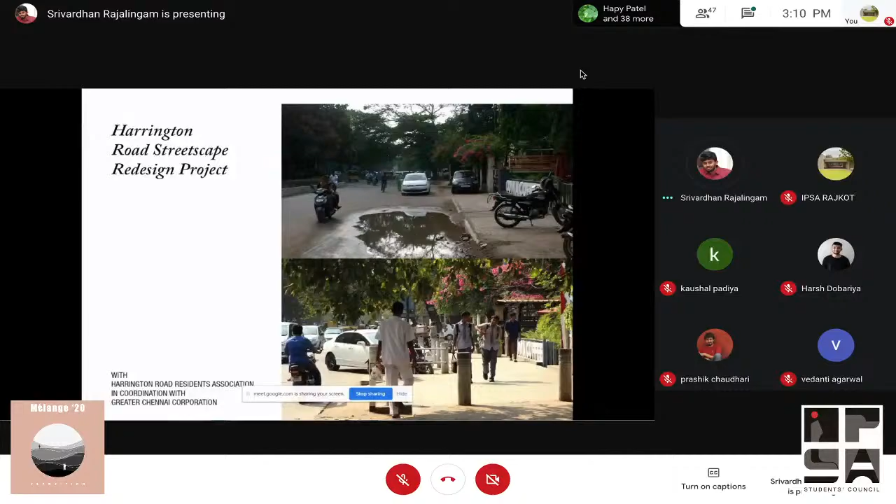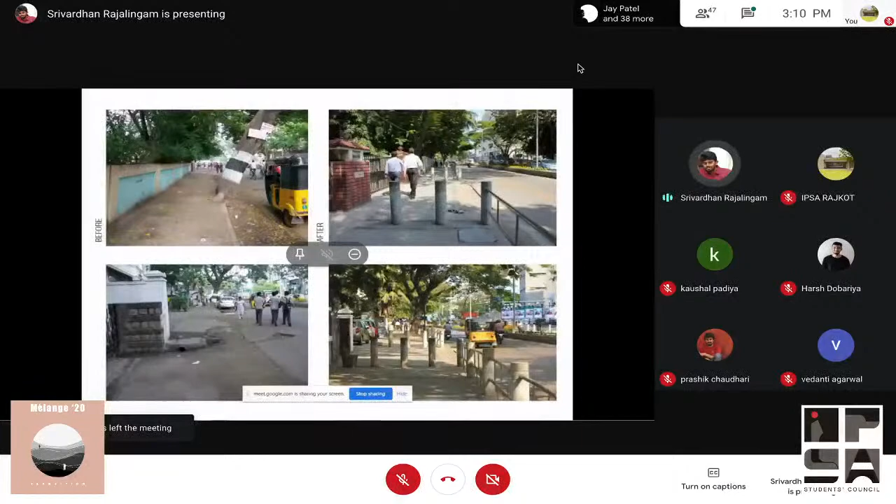This is one of those streets where a wheelchair user can access the entire street without getting down. The highest priority is given to pedestrians, who can walk continuously along the entire stretch without needing to get down or go up. It's made completely accessible. These are some images showing the before and after transformation.

Moving to the next one, the Accessible Beach Walkway project, again a community initiated project. Here in Chennai, on December 3rd, which is World Disability Day, they make temporary mat tracks for wheelchair users to access the water.

Marina Beach here in Chennai is one of the most used public spaces, yet it's not accessible. But as per the 2016 Disability Rights Act, all public spaces and buildings are required to be accessible.

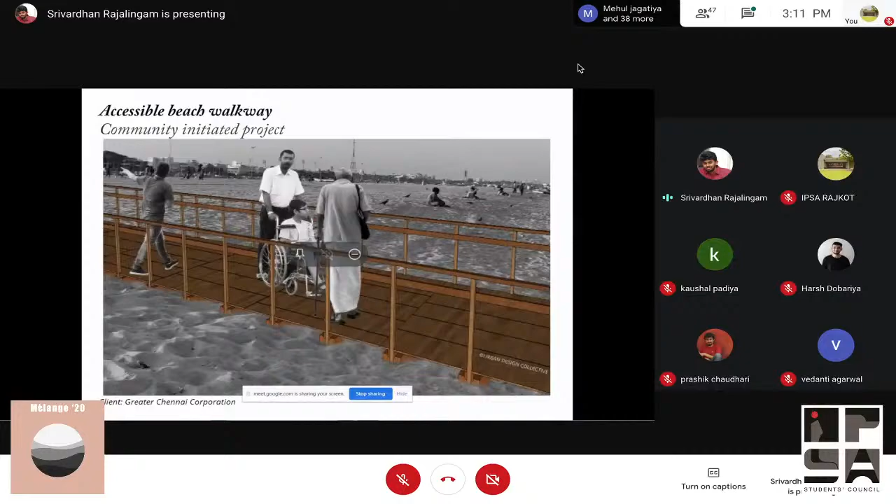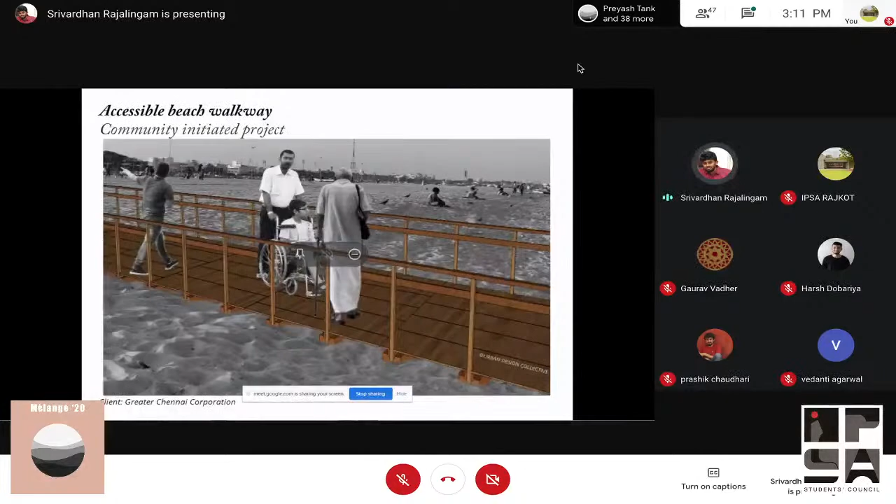Since then, this project has been happening temporarily, where they had the mat, and a couple of years back the commissioner decided this can be made permanent. So since then we have been working on this project. This is a pathway that leads to the water, and this has been going on for almost 4 years now.

There have been multiple changes in location because this requires CRZ clearance, community concern, and all of that. When we went to one location to meet the community, we actually had a setback, because this was along the village death procession route.

So they had opposed that particular pathway, and we had to drop this location. This is how stakeholder engagements happen here, where if we are moving a project and there is opposition from the people, then we cannot go ahead and implement the project. There has to be a way to accommodate their needs as well.

For this particular community engagement meeting, we had actually taken a model of the pathway to show them what is going to come up, so that they can understand and see if their activity can still continue. But since they had oppositions, we dropped this location, and now we are working on shifting it to another location, which is still work in progress.

For this particular site, the meeting happened after we had submitted the DPR, everything was ready, tender was called for, the contractor was ready. But since the community leaders had expressed their opposition, we had to drop this particular site even at the almost the end point.

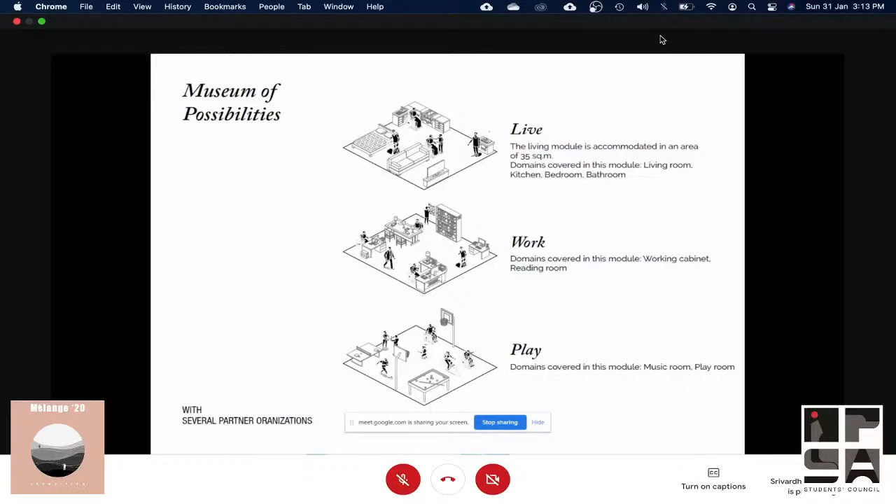This museum is actually a demonstration, an interactive museum where they can use and experience different devices and assistive technologies. There are so many assistive devices, aids, and other things that actually help them overcome disability and function at ease on a day-to-day basis. This museum is a demonstration of all of that.

This is currently in a detailed design development phase, which is back and forth work, because we as architects and designers have to understand what their requirement is, and it's being designed with them as per what they want for these spaces and other things.

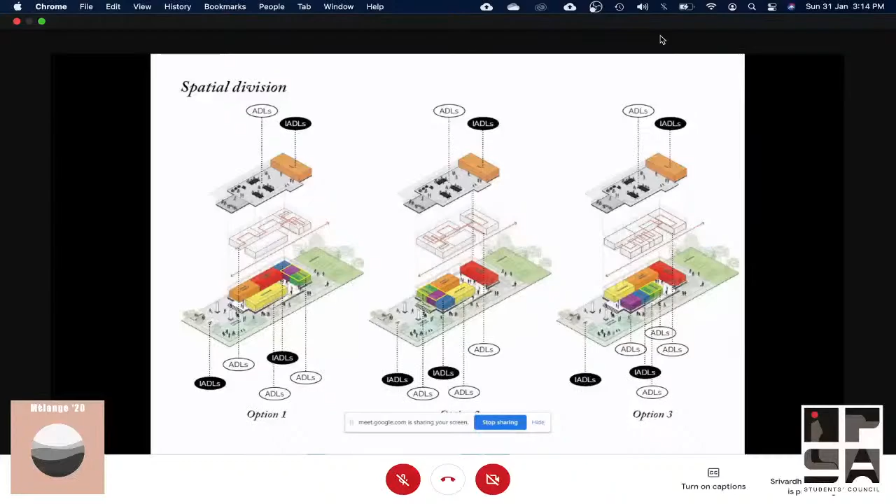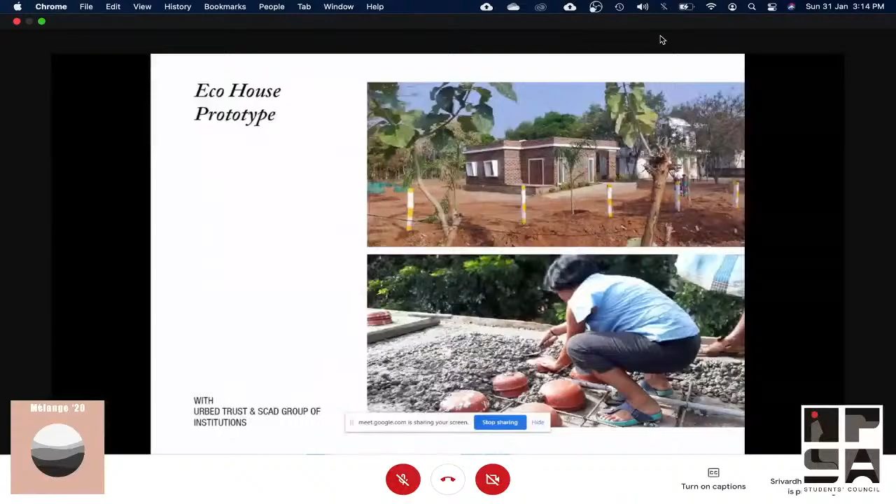The next thing is a residence project, done in Tirunelveli, a guest house. This is a completely eco-friendly house. The way of engaging the community here was that most of these were their own traditional styles from their neighborhood villages, but today a lot of these are not in practice.

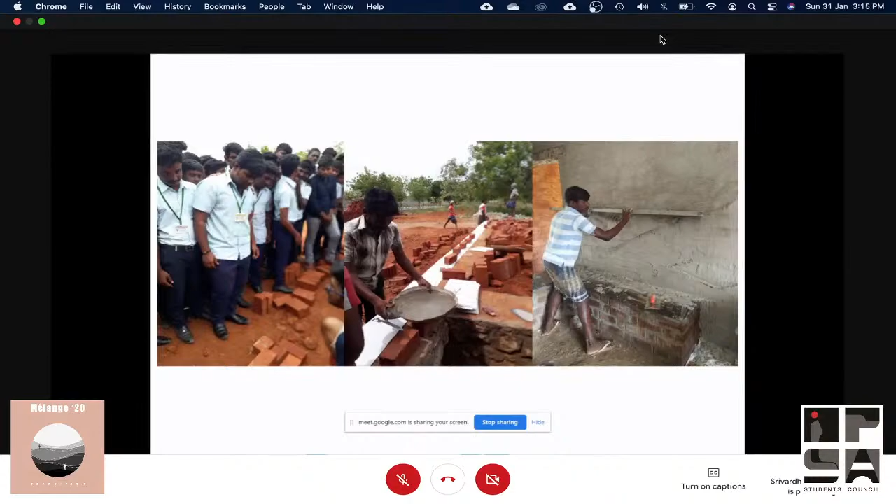This is inside an institution campus, so we had gotten civil students to understand how this was done. This was also done as a capacity building exercise for the local labor, so they understood how to work with their own techniques and make a house that is completely sustainable and low cost. This is how we taught them to do that.

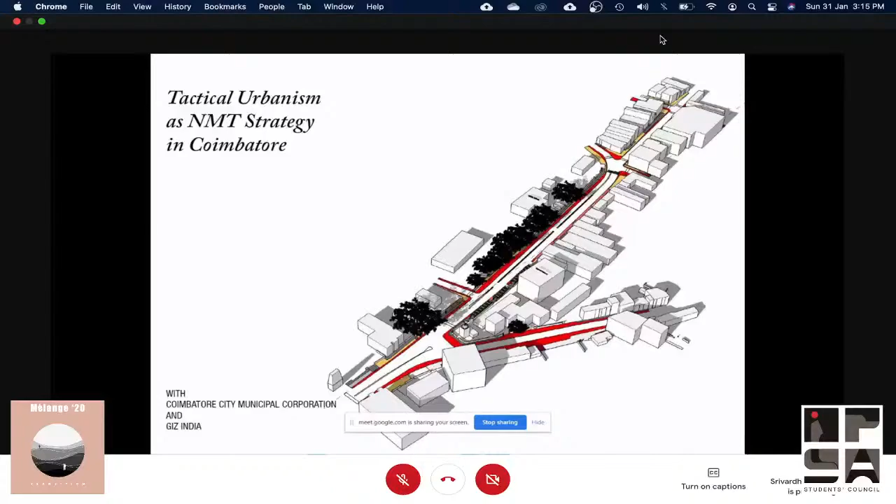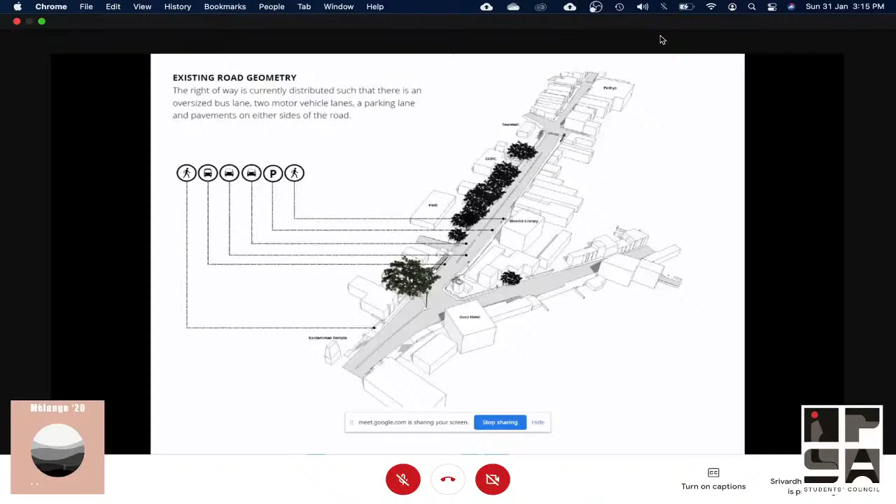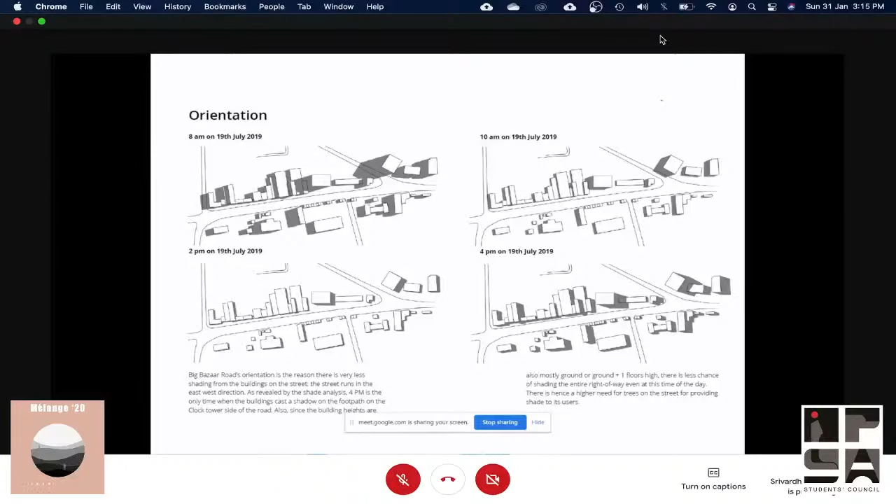This is a street redesign project, a demonstration of a complete street project. We wanted to do a short-term action that would lead to a lot longer-term change. This is the existing street condition, and we had resolved all of those based on the actual requirement of the site. We did a series of mapping and other analysis.

This analysis talks about orientation and shading at that particular street, and since it lacked shade, we proposed shading structures. This is how it looks when the entire street is redeveloped as per what is actually needed. The full extra carriageway space, the space for vehicles to move, was streamlined.

In general, streets are considered as just something for vehicles to move, but that's not the case, as there are so many other users—vendors, pedestrians, cyclists, and all of that. So this space was regained for all of them and shown to the public on how it works. These are some of the images that we have.

As part of this, we also tried to understand who the user groups are and how much time they spend. Based on that, post implementation of the temporary tactical urbanism, we identified the list of user groups and the time we could engage with each.

So that's done. I'd like to conclude with what a student can do, and what important things to keep in mind with respect to public participation. The first thing is informing the community about the plans, process, and decisions.

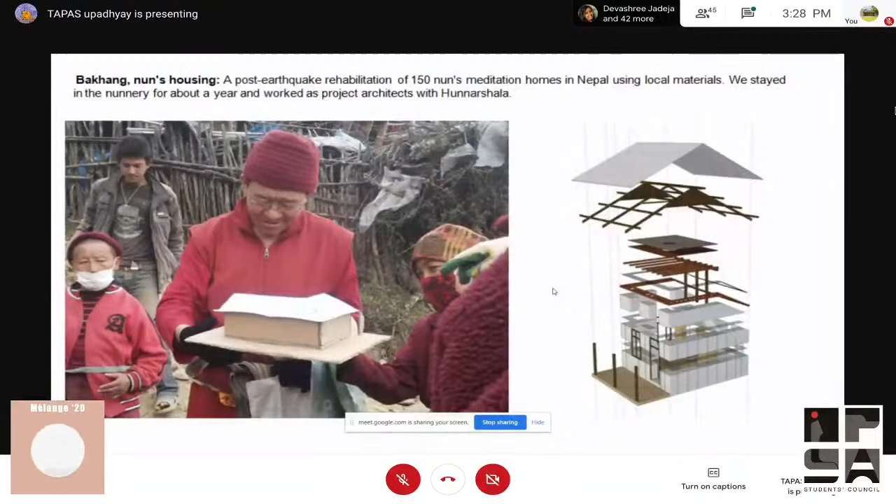So then we built the model with certain basic elements which we had over there, and presented it in front of them. They were very happy to accept the model and the approach we were taking. And then we built these 150 mud houses.

This is a place with no road connectivity, even no electricity at that point in time. So everything we had to build was by default with local stone, or reclaimed stone from their old houses, and mud which we got just beside the site.

So now what I'll be doing is just share the images and explain the process as well.

Here the nuns were so excited for their new houses, also because they were living in poor conditions after the earthquake had hit. So this was partly a public participation and partly contractor participation process, in which the nuns were responsible.

They were very happy to bring mud onto the site, apply it on the surfaces, and also help the masons to build their houses.

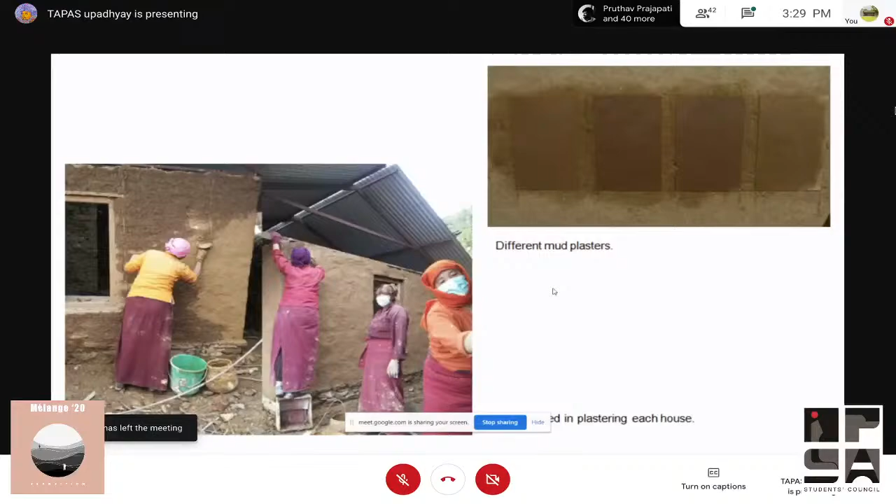In this process we also came across a strong aspiration towards urban areas, because all of them really wanted to build cement houses for themselves. But with a lot of public interaction and imparting understanding of why it was not possible in this space and time...

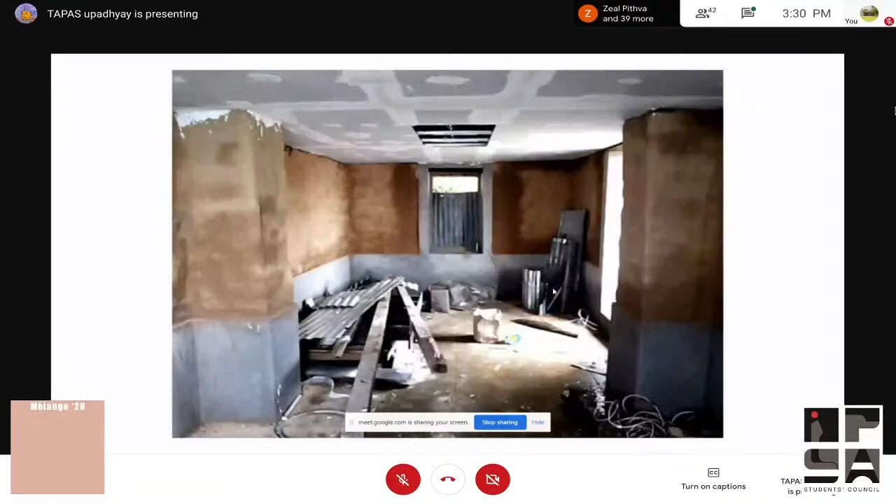...we came around with a midway approach, in which we tried to use urban materials in a very specific way.

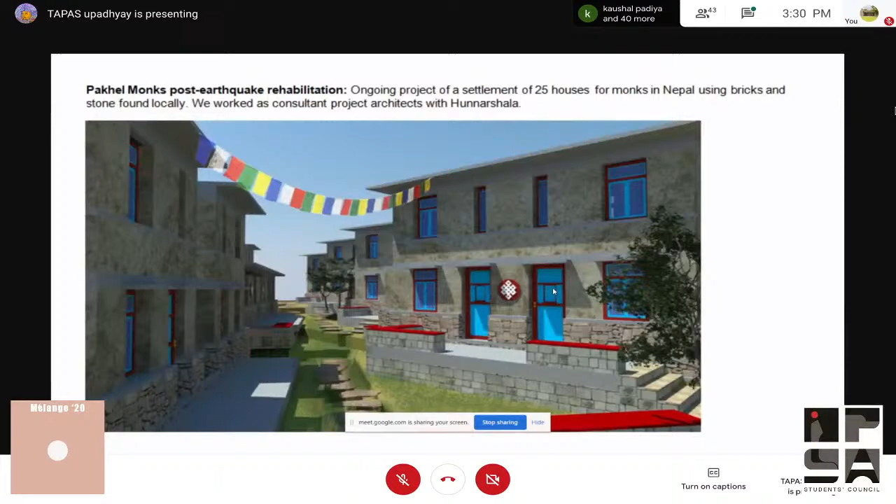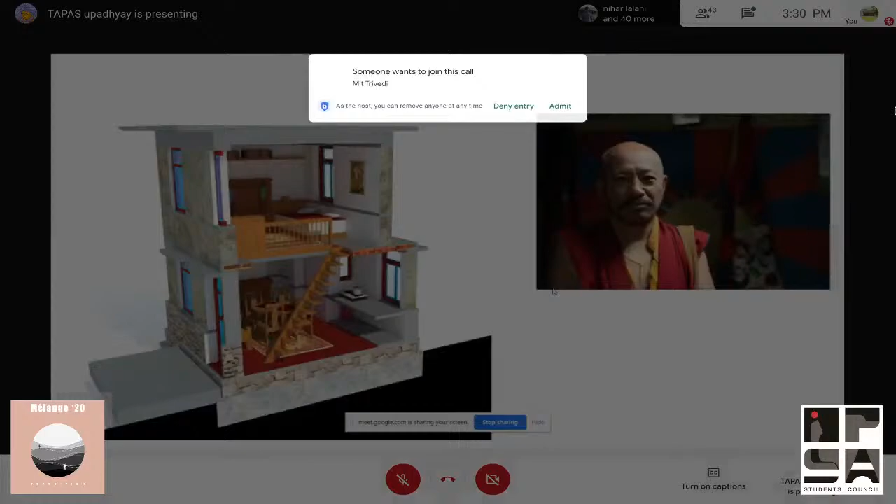So this was the short story of Bagan. Then there was another set of monks, Tibetan monks, different from the nuns, with a different set of thinking as well, and with all the social process involved - this is the ongoing process here right now.

The second project we were involved in was in Uttarakhand, in Baram - a small village. This was the only school in the whole region, where all the students would walk for two hours to come to school to study.

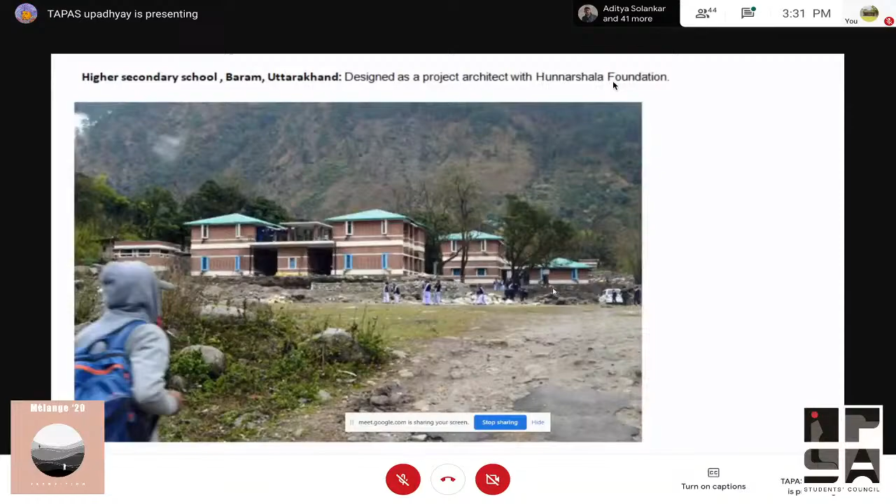So it had to be very responsible design by default. We interacted with all the children in participation sessions - how they wanted to study and why - with separate meetings with the school kids, teachers, and authorities. Then we came around with a certain design and material palette for this situation.

After this five years of journey, we were thinking about how we wanted to proceed in our life, because we were very sure that we didn't want to specifically build only buildings or structures, but wanted to build relationships - human relationships. Building human relationships is also, I think, an architecture in itself, if we see it in a different way.

With this whole set of thinking, we came around with a process we call Agor, in which we can collaborate with individuals and build or create something which is humane.

Also when I was at Hunnarshala, I was very fortunate to document all the masons who are there and who are carrying the living tradition forward.

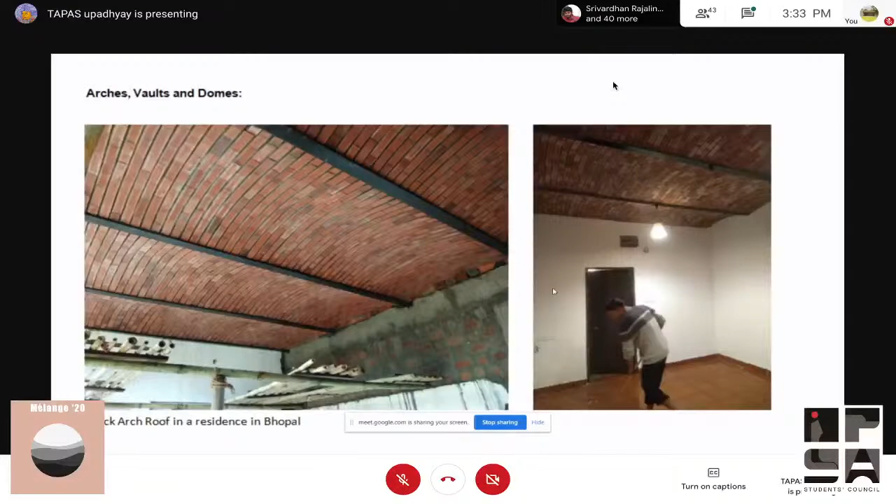So this, with different material as well. In urban areas, personally I think that locally available material is not stone or other prepared materials, but the waste materials, like debris waste or other kinds of waste which you have. So how can we create possibilities to build the structure with this thinking, this set of thinking?

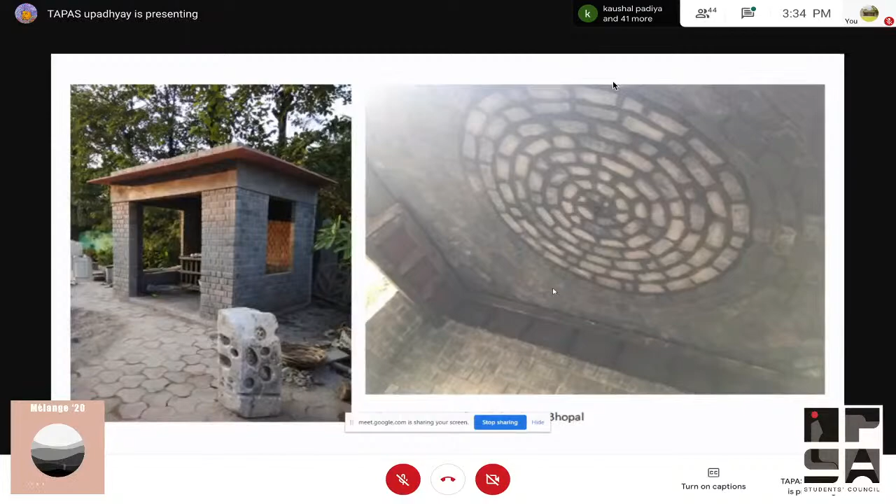In this situation, we tried to build a shallow masonry dome with fly ash, debris blocks, and all the stuff as well. And then we started our practice collaborating with local masons from Rohtak. You can see in the right photograph, he is Azad Bhaiya.

We collaborated and performed a workshop on shallow masonry dome throughout several colleges in our country. Then after that, we got the chance to explore our thinking and local available building craft in and around Bhopal as well.

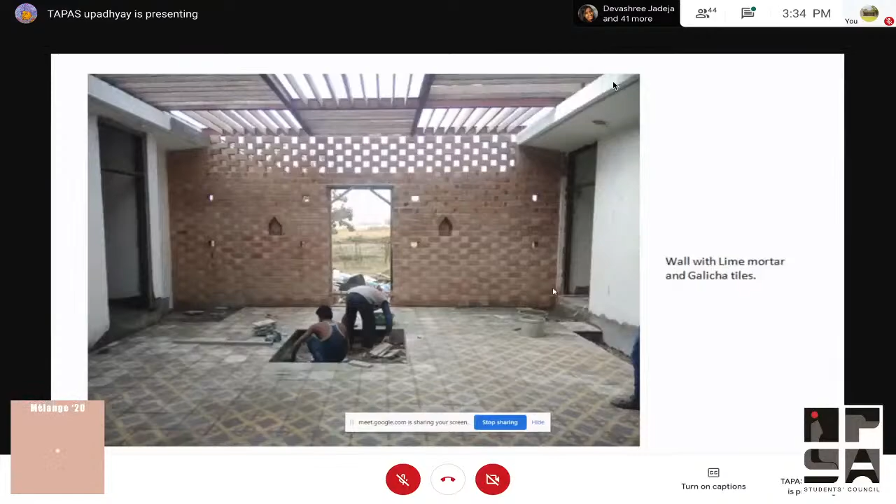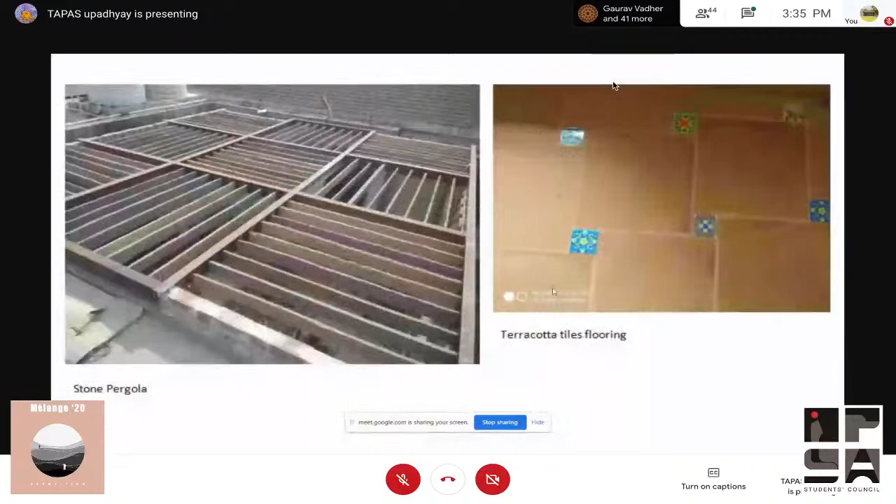For example, here we tried to explore galicha tile. Galicha tile is a handmade cement tile with different beautiful patterns, which you can get in several parts of the country as well. But here it was a very old craft, and it had been washed away by the new tile techniques.

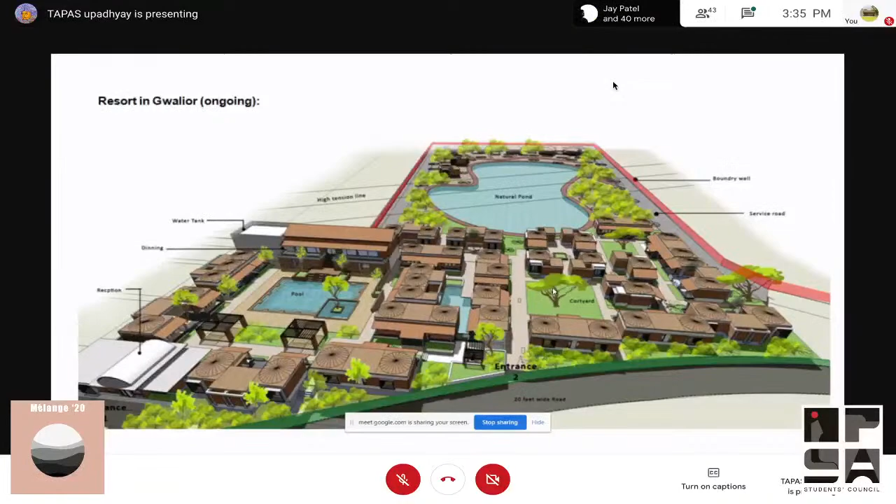And now we wanted to collaborate with more people and more artisans, who cannot necessarily be trained in the traditional craft, but there is a village very near to the site called Panihar. So we visited Panihar and talked to the masons, and they were very interested in learning and exploring new ways of building which they hadn't explored until now.

So then we collaborated with them, and we built all the rammed earth wall with them and all the things which you can see over here.

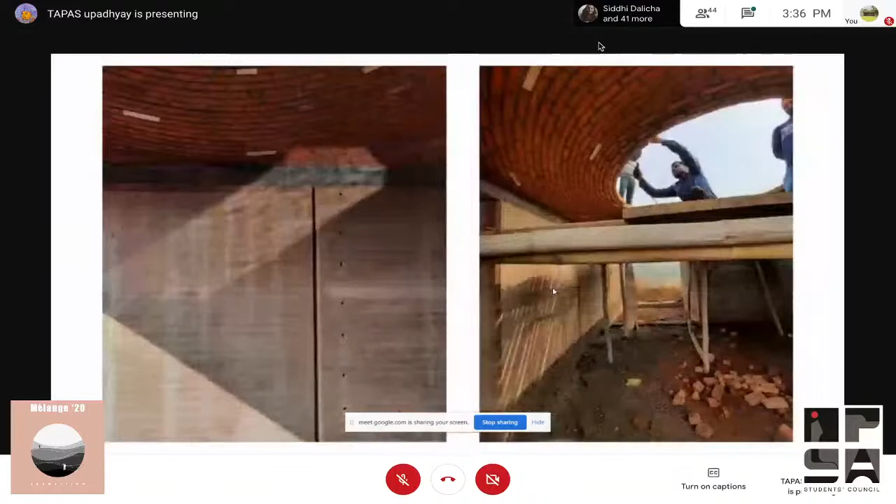We also continuously collaborate with the local masons of Haryana and Uttar Pradesh to come up with new possibilities and new aesthetics of the traditional craft of Daat ki Chhat. Here we are using stones and new patterns and also new materials.

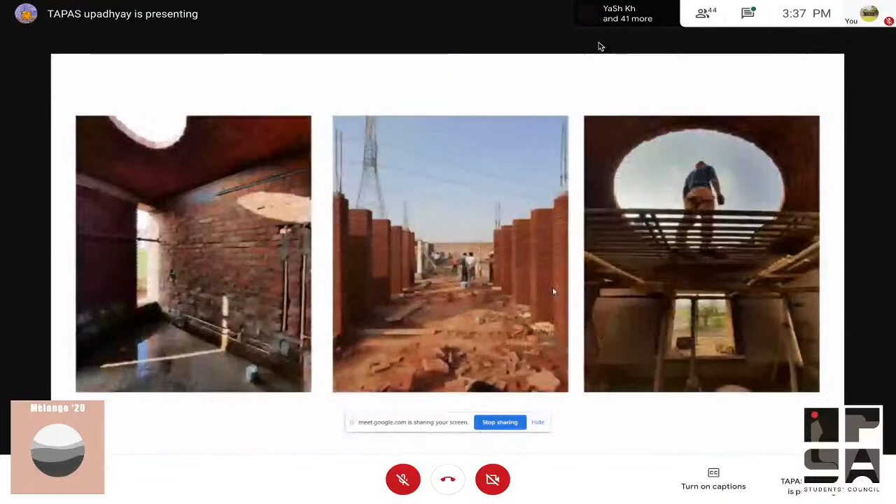For example, in Gwalior, we thought of using this farsi silbatta, on which we used to prepare chutneys and all the stuff. We thought of using this somewhere beautifully in our structure as a harmony. So we came up with the idea to basically...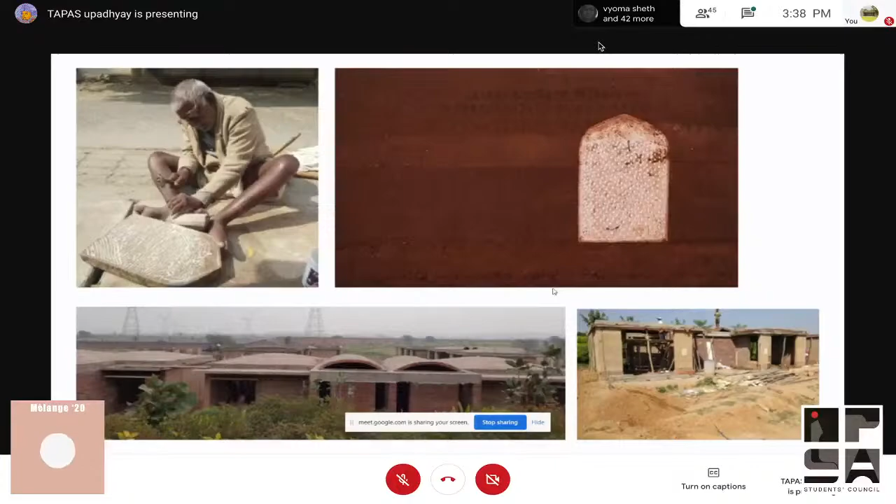...emboss room numbers on the silbatta and then emboss it onto the rammed earth wall. So it came out beautifully, and of course there are new possibilities for the arts in domes and walls.

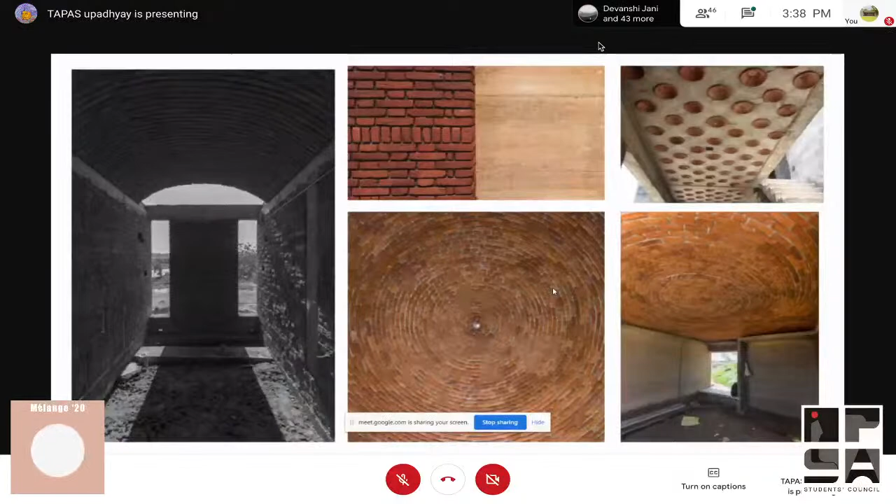This is another project in Bhopal. This was done recently on a campus called WALMI, Water and Land Management Institute. The authorities there really wanted to build something that would be an example for the whole city, showing how you can build right now with the present global scenario.

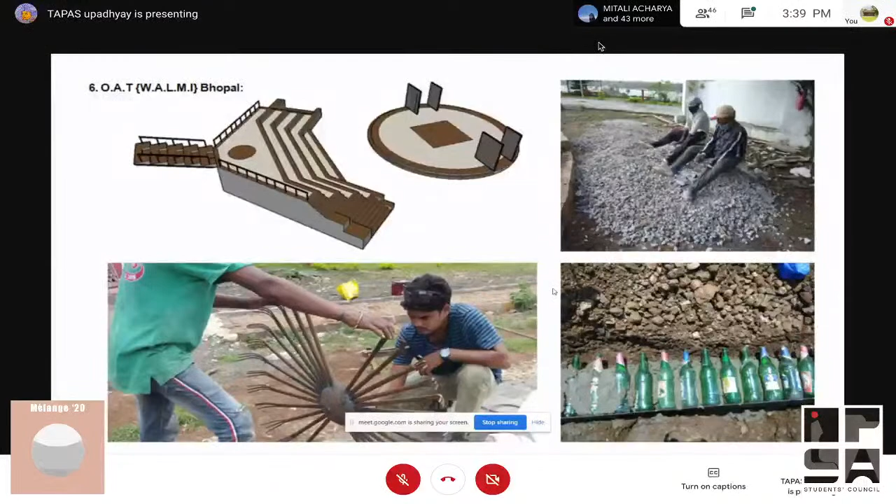So we came up with the idea to build a complete open air theater, which was the need of WALMI, using waste materials. For example, here you can see photographs of people breaking debris into a particular size to build a debris wall, using waste bottles and waste metal pieces. Combining all this together, we tried to build this geometry.

And now they like this space, and they are reusing it as a social engagement spot for different communities around Bhopal.

We also wanted to explore different possibilities to engage with different crafts. We started curating an exhibition for LLDC, Living and Learning Design Centre, a beautiful textile museum in Bhuj. The first opportunity we got there was to curate an exhibition called Zari of Zardozi.

It was also a very beautiful and new experience for us, because we were asked to try, since they were very happy with our approach and everything, and they really wanted to see how this approach could be accommodated into designing and curating the exhibition.

So here also we tried to talk with different artisans of different parts of the country, to get their aesthetic sense and try to inculcate it into the exhibition as well.

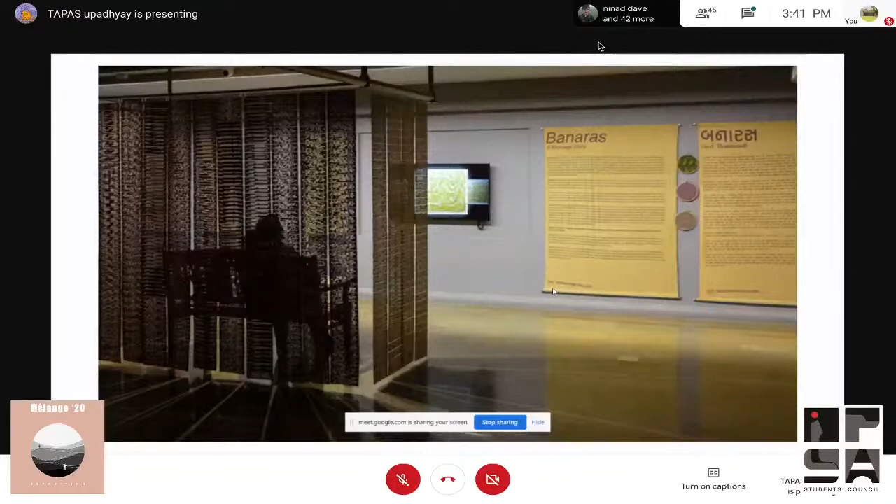The next exhibition we did in the same gallery was on Banaras brocade. So all the textures, colors, and everything you can see here, we tried to sync with the sense of the sarees which we get in Banaras. For example, the screen you see here is made out of jacquards, which are the waste cards we get from Banaras and the artisans over there. These are basically the templates for the design of Banarasi sari, and we tried to use it as a screen.

And also now in the process of collaborating and exploring new possibilities of reaching out to people - I myself am a folk musician, related to Malwa, and there is a yearly event in Malwa known as Malwa Kabir Yatra, a musical journey of folk music. This time we got the opportunity to design the stages of the whole yatra.

This was a very beautiful journey in which we had to design 5 stages in 5 days. We had one truck which had all the equipment in it, and another set of vehicles in which we had all the volunteers and ourselves.